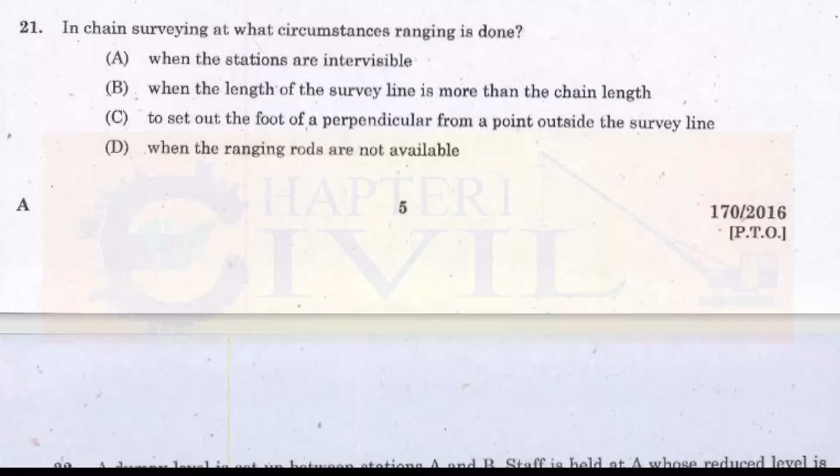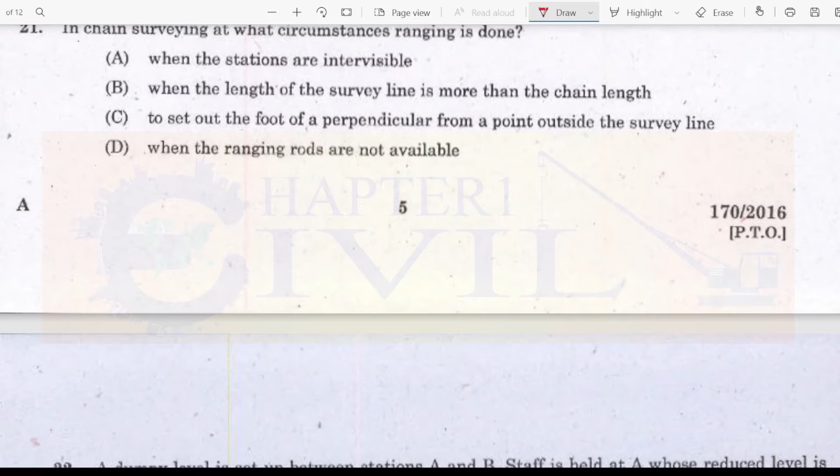Question number 21. In chain surveying, at what circumstances ranging is done? Option A, when the stations are intervisible. Option B, when the length of the survey line is more than the chain length. Option C, to set out the foot of a perpendicular from a point outside the survey line. Option D, when the ranging rods are not available.

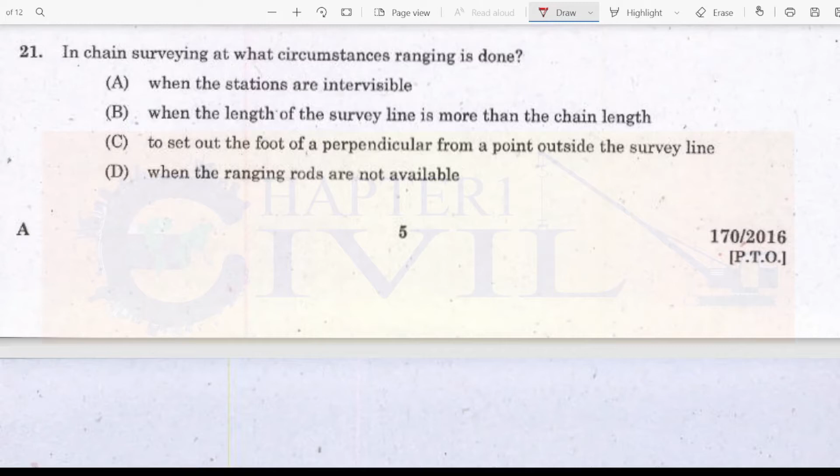So option B is the correct answer. Question number 22. A dumpy level is set up between stations A and B. Staff is held at A, whose reduced level is 100 and backsight is noted as 1.1. Then foresight is noted as 1 after holding the staff at B. What is the reduced level of B?

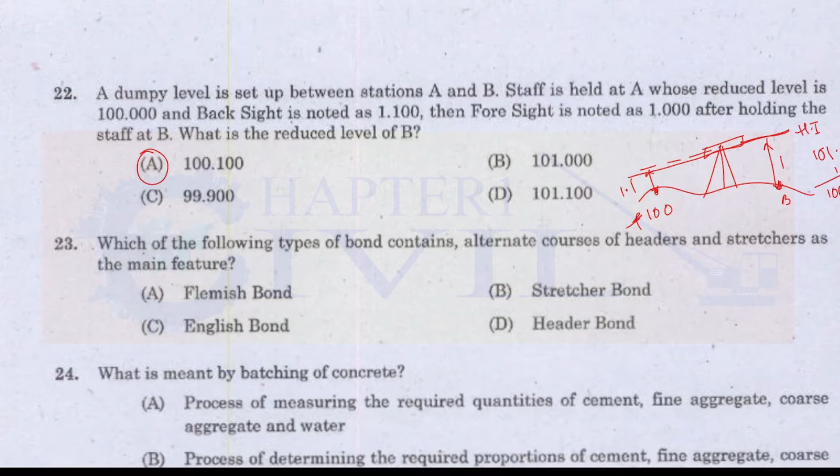Quantities of cement, fine aggregate, coarse aggregate and water. Option B, process of determining the required proportions of cement, fine aggregate, coarse aggregate and water for a particular mix. Option C, process of mixing the required quantities of cement, fine aggregate, coarse aggregate and water for a particular mix. Option D, process of separating the different types of concrete into different batches. It is the process of measuring. So correct answer is

option A. Question number 25. Which among the following is not a structural steel section? Option A, channel section. Option B, angle section. Option C, T section. And option D, Tor steel.

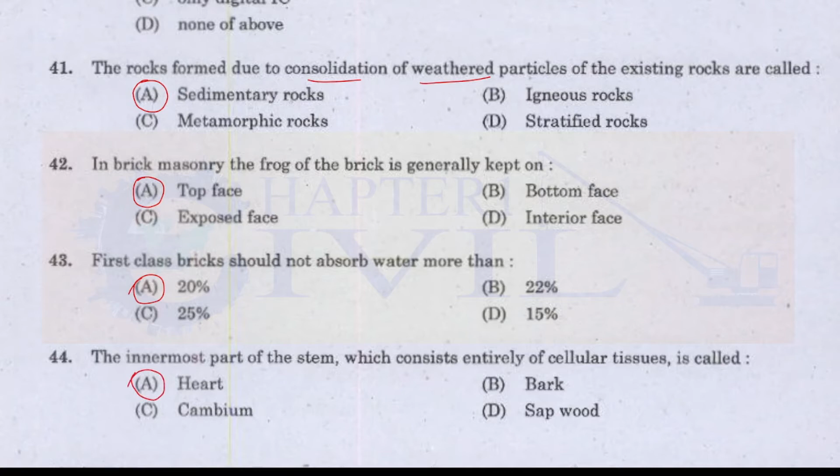Question number 45. Pulverizing clinkers and mixing blank results in the material called cement. Clinkers and mixing gypsum. Option A, gypsum. Option B, limestone. C, clay. D, silica. Gypsum is what we add.

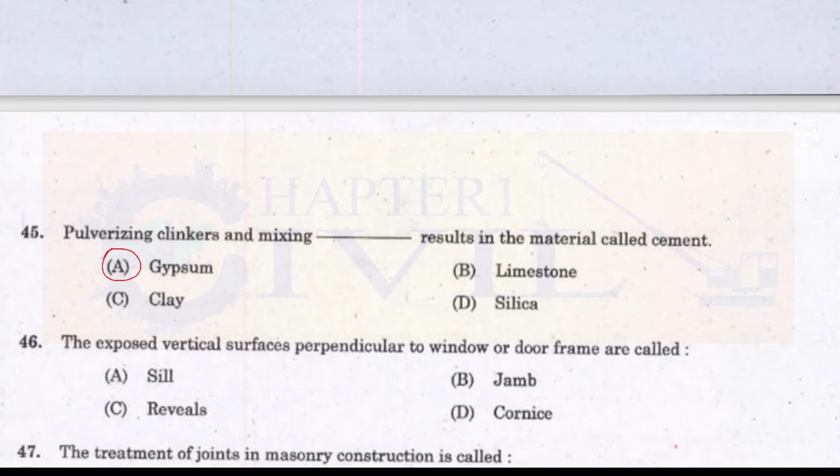Calcium sulphate. Question number 46. The exposed vertical surfaces perpendicular to window or door frame are called option A sill, option B jamb, option C reveals, option D cornice. Exposed vertical surface perpendicular to window or door, it is reveals. Option C is the correct answer.

Question number 47. The treatment of joints in masonry construction is called option A plastering, option B pointing, option C painting, and D none of these.

The treatment of joints in masonry is called pointing. In joints, the work is pointing.

Question number 48. The undersurface of a stair is called... This is a repeatedly asked question. Option A headroom, option B scotia, option C soffit, and option D none of the above. The underside is called the soffit of the stair.

Question number 49. The operation of providing new permanent foundation is called option A shoring, option B scaffolding, option C underpinning, option D none of these. The correct answer is underpinning.

Question number 50. Plastics can be broadly classified as A. Monomers and polymers, B. Thermosetting and thermoplastic, C. Soft and hard, D. Elastic and rigid. The correct option is option B, thermosetting and thermoplastic.

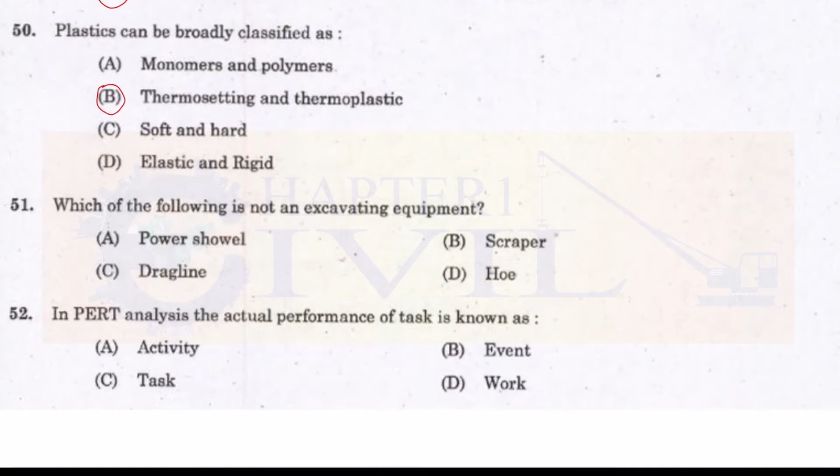Question number 51. Which of the following is not an excavating equipment? Option A power shovel, option B scraper, option C dragline, option D hoe. The one that is not excavating equipment here is the scraper. So option B. Scraper is not an excavating instrument or equipment.

Question number 52. In PERT analysis, the actual performance of task is known as option A activity, option B event, option C task, option D work. Actual performance of task is called activity.

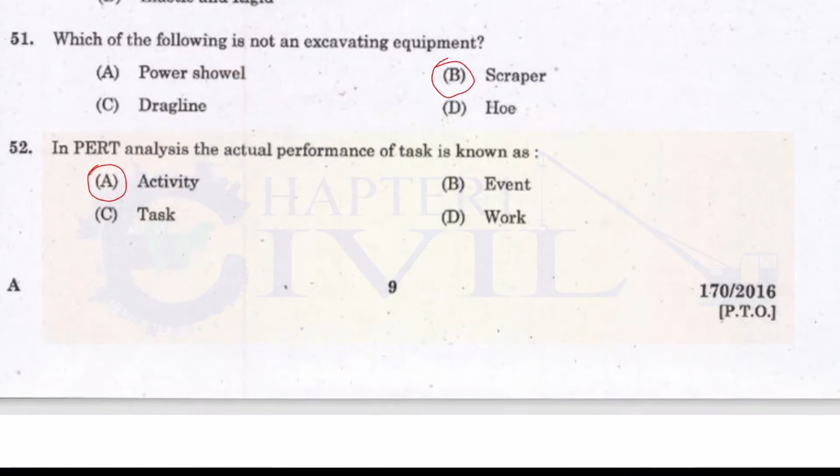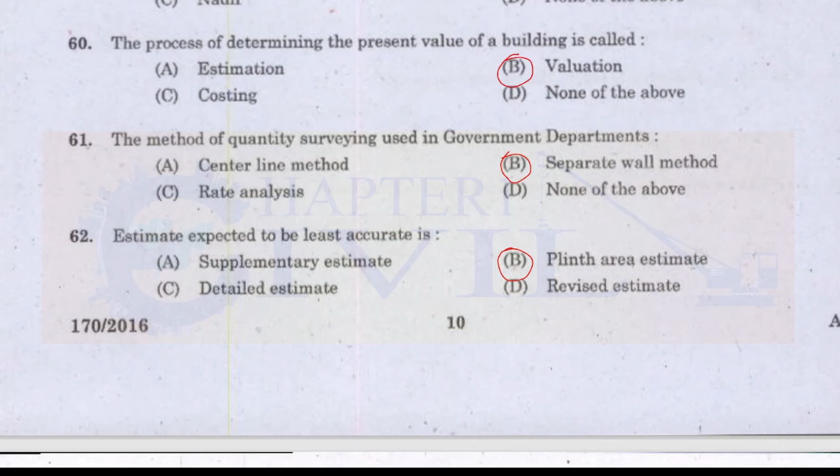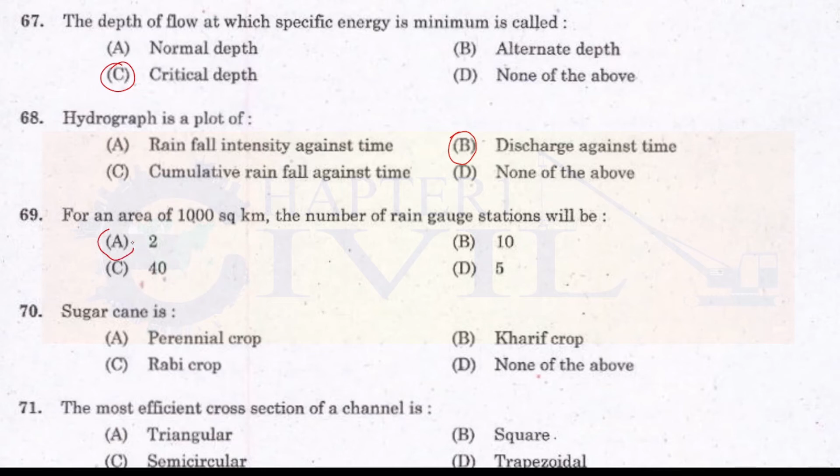Question number 70. Sugar cane is a: option A perennial crop, option B kharif crop, option C rabi crop, option D none of the above.

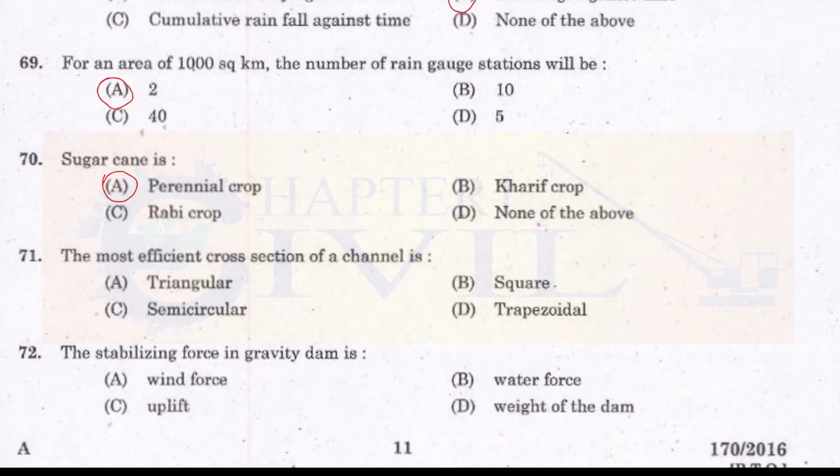Question number 71. The most efficient cross section of a channel is: option A triangular, option B square, option C semicircular, option D trapezoidal. The most efficient practical cross section is trapezoidal.

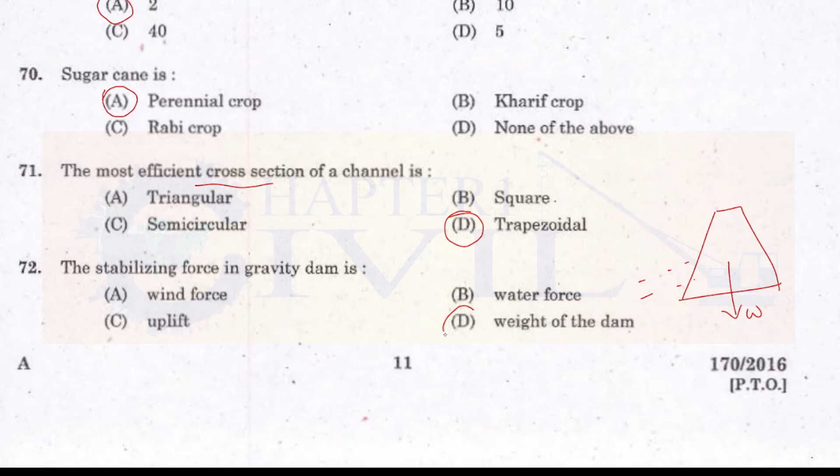Question number 72. The stabilizing force in gravity dam is: option A wind force, option B water force, option C uplift, option D weight of the dam. The stabilizing force that resists water pressure is the weight of the body of the dam. So option D, weight of the dam, is the stabilizing force of a gravity dam.

Question number 73. To estimate the water quantity, which one of the following is most important? Option A rate of demand and population, option B cost of supply and population, option C adequacy of source and cost of supply, option D all of the above. To find water quantity we need to know rate of demand and population. So option A is the correct answer.

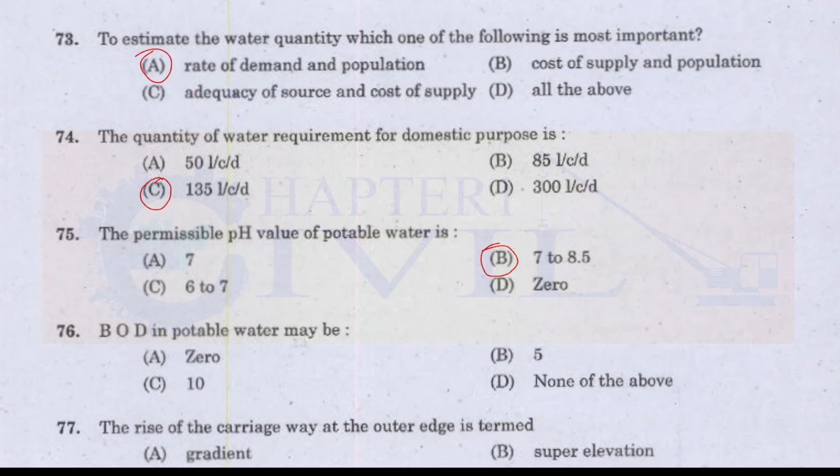Question number 75. The permissible pH value of potable water is: option A 7, option B 7 to 8.5, option C 6 to 7, option D 0. It can be slightly alkaline, so 7 to 8.5 is the permissible pH value of potable water.

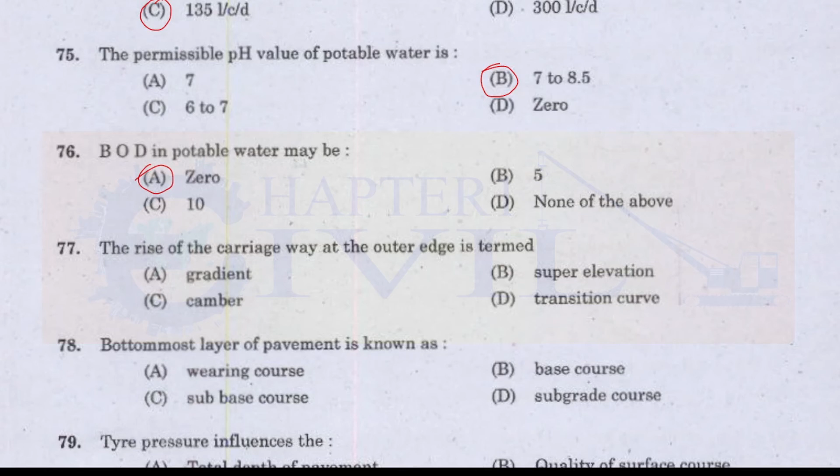Question number 76. BOD in potable water may be: option A 0, option B 5, option C 10, option D none of the above. BOD in drinking water, potable water, is always 0. E. coli bacteria 0, most probable number, MPN, 0.

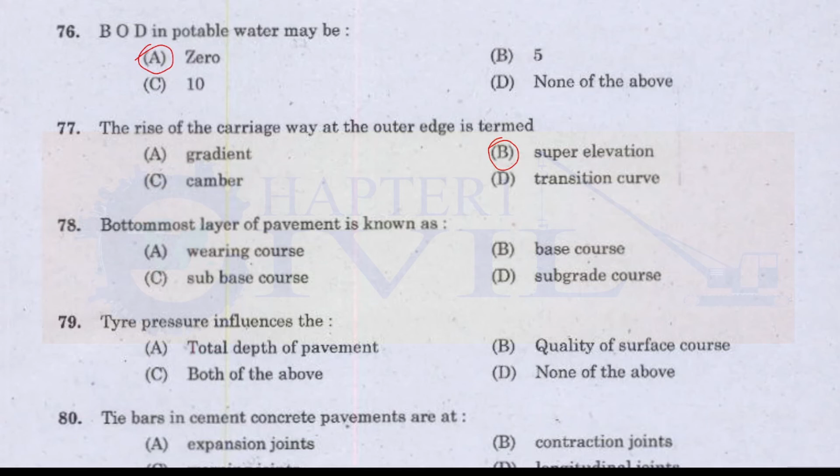Question number 77. The rise of the carriageway at the outer edge is termed: option A gradient, option B super elevation, option C camber, option D transition curve. It is super elevation. Question number 78. Bottommost layer of pavement is known as: A wearing course, B base course, C sub-base course, D subgrade course. From the bottom: subgrade, sub-base, base and wearing.

Question number 79. Tire pressure influences the: A total depth of pavement, B quality of surface course, C both of the above, D none of the above. It depends on the quality of the surface course. Question number 80. Tie bars in cement concrete pavements are at: option A expansion joint, B contraction joint, C warping joints, D longitudinal joints. Tie bars are provided at longitudinal joints.

Question number 81. Which of the following tests measure the hardness of road aggregate? Option A crushing test, option B abrasion test, option C impact test and option D soundness test. To measure hardness, we use the abrasion test.

Question number 82. The maximum design gradient for vertical profile of a road is: A ruling gradient, B limiting gradient, C exceptional gradient, D minimum gradient. Maximum design gradient is ruling gradient. The maximum gradient given by the designer is always the ruling gradient.

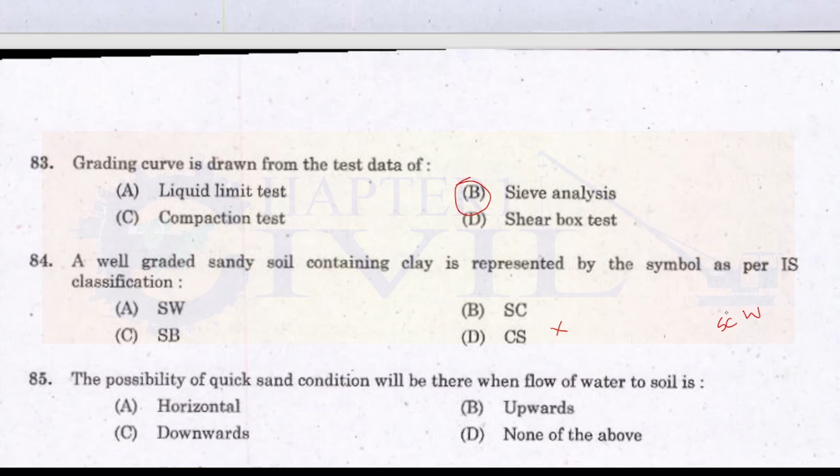Question number 85. The possibility of quicksand condition will be there when flow of water to soil is: A, horizontal; B, upward; C, downward; D, none of the above. When the flow of water in the soil is upward, then quicksand condition occurs. There is a possibility for quicksand condition or boiling of sand.

Question number 86. Compaction of soil is measured in terms of specific gravity, void ratio, compressibility, dry density. It is measured in terms of dry density: optimum moisture content, maximum dry density.

Question number 87. Static sheep foot roller is most effective in compacting gravel, sand, clay, none of the above. Sheep foot roller is most effective for clay soil.

Question number 88. In a shear box test, the failure plane is: weakest plane, horizontal plane, vertical plane, principal plane. The correct answer is horizontal plane.

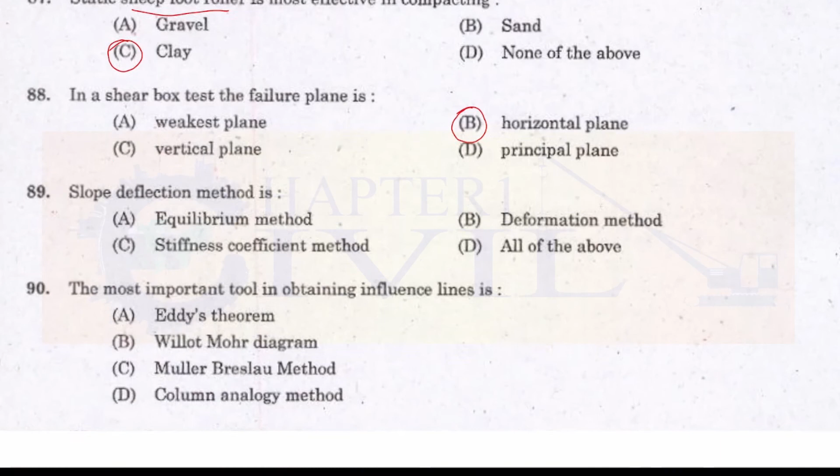Question number 89. Slope deflection method is a: equilibrium method, deformation method, stiffness coefficient method, all of the above. Question number 89 is all of the above. It is an equilibrium and deformation method and stiffness coefficient method also.

Question number 90. The most important tool in obtaining influence line is Eddy's theorem, Willot Mohr diagram, Muller-Breslau method, column analogy method. Influence lines from Muller-Breslau theorem.

Question number 91. Which arch is statically determinate structure? A. Single hinged arch, B. Two hinged arch, C. Three hinged arch, and D. Fixed arch. Three hinged arch is statically determinate.

Question number 92. Which of the following is a force method? A. Slope deflection method, B. Column analogy method, C. Moment distribution method, and D. None of the above. Column analogy method is a force method. All others are displacement methods.

Question number 93. For splicing tension reinforcement in flexural members, the most suitable location is A. Point of inflection, B. Point of maximum bending moment, C. At the supports, D. None of the above. The correct answer is point of inflection.

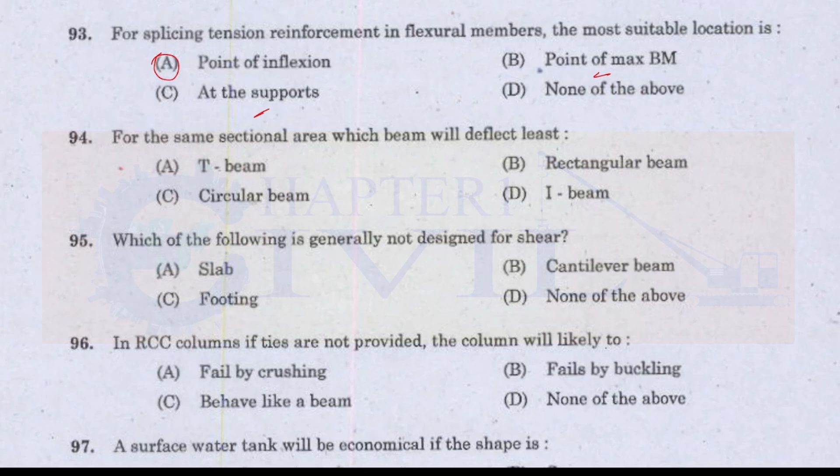Question number 94. For the same sectional area, which beam will deflect least? A. T-beam, B. Rectangular beam, C. Circular beam, and D. I-beam.

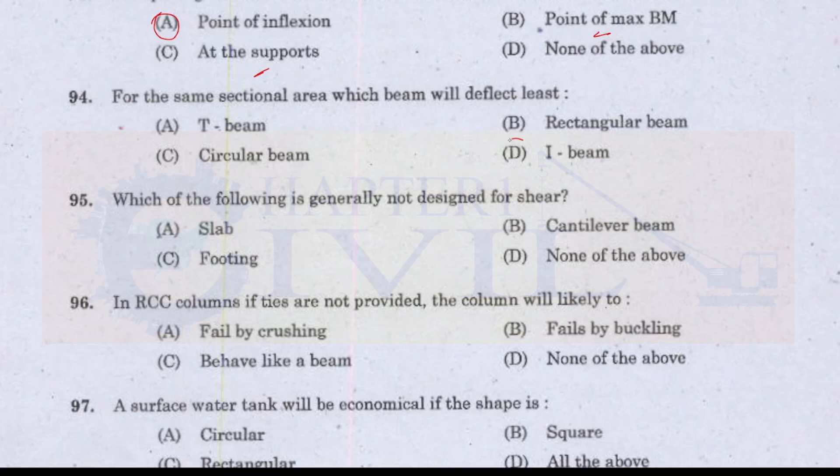Question number 95. Which one of the following is generally not designed for shear? A. Slab, B. Cantilever beam, C. Footing, D. None of the above.

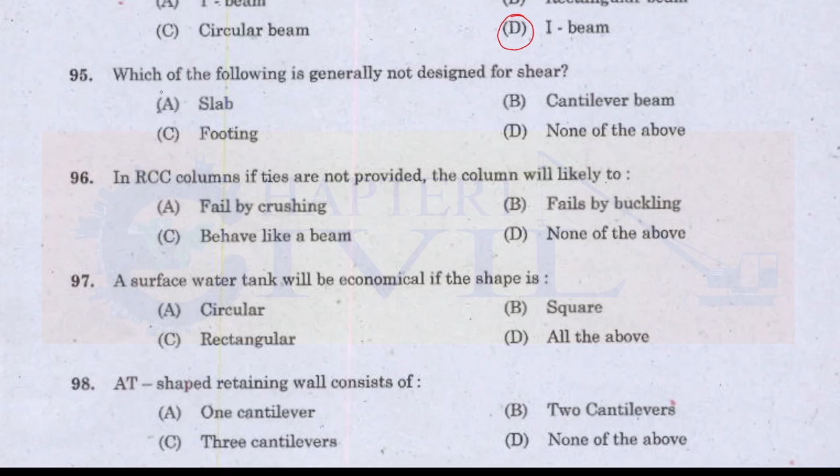Question number 96. In RCC columns, if ties are not provided, the column will likely to: option A, fail by crushing; option B, fail by buckling; option C, behave like a beam; option D, none of the above. If ties are not provided in RCC columns, it will fail by buckling.

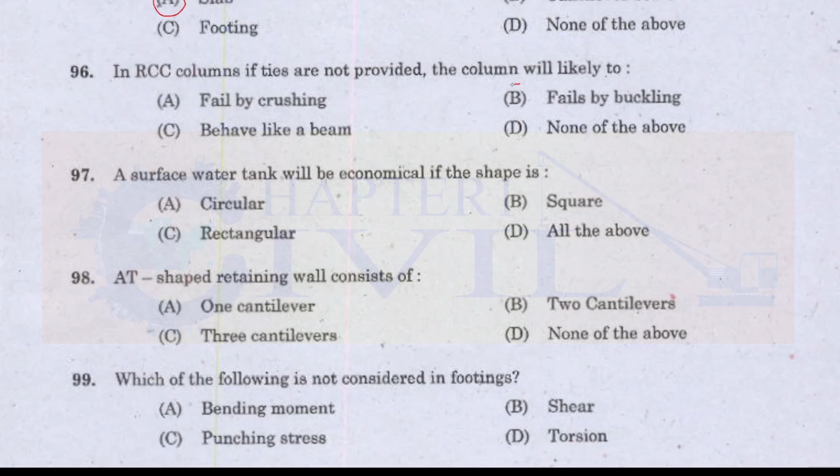Question number 97. The surface water tank will be economical if the shape is option A. Circular, B. Square, C. Rectangular, D. All of the above. It is economical when the water tank is circular.

Question number 98. A T-shaped retaining wall consists of option A, one cantilever; option B, two cantilevers; option C, three cantilevers; option D, none of the above. A T-shaped retaining wall has three cantilevers.

Question number 99. Which one of the following is not considered in footings? A. Bending moment, B. Shear, C. Punching stress, D. Torsion. Torsion is what we don't consider.